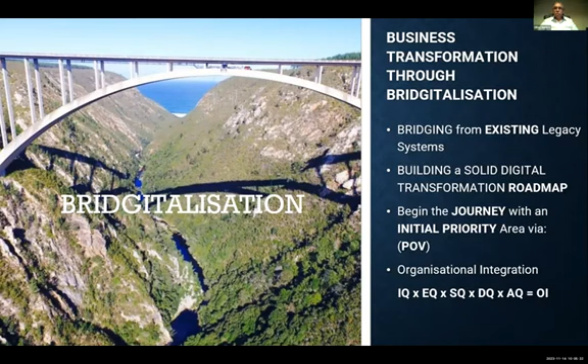So the first thing is a number of the mining sector companies are challenged, especially in South Africa. You've got challenges of load shedding, where it's impacting the business operations, and you're also investing in supplementary alternative energy sources. You're also challenged by Transnet with the transportation and logistics, both on the rail as well as the logistics side of things at the ports, and also some of the cycles in terms of lower pricing of the commodities at any given time.

So all these journeys that we're embarking on with digital has to support the business transformation. But we also have to have a product agnostic mindset. And what we've seen from our experience is that companies would buy brands and products as opposed to understanding what the business challenge is at that particular time while you look at the appropriate technology that you embark on.

We also know that there's been divisions between IT and operational technology. We need to align IT with operational technology as well as engineering technology and build an architecture that supports the overall business strategy. This is how we move beyond pit to actual profit, becoming visible across the entire value chain, including planning, scheduling, and optimization.

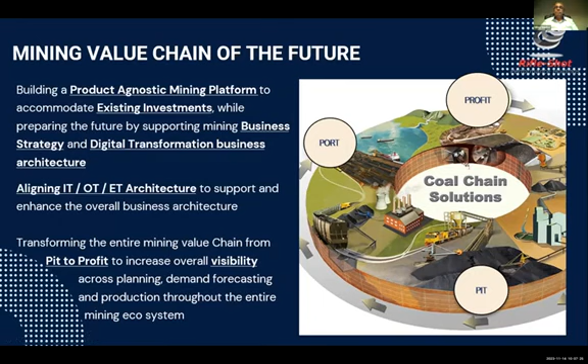I wanted to touch briefly on what used to be called supply chain, which we've coined value chain optimization and visualization. You're familiar with this, where you go through exploration, extraction, production, processing, inventory management, and logistics on the rail and port side, and then ultimately shipping to the end client.

Peter, who's speaking after me, will cover a lot on things like stockyard management, so I'll skip that. But I want to touch a little on the production side, where we've selected some of the best OEM offerings and made it very easy for you.

If we look at our partnership with AVEVA, we have offerings for production management, commonly known as AMPLA, and on unified planning and scheduling called Spiral. We've implemented this with mining companies.

A recent example from our previous webinar was how we automate and digitize downtime management. Although we were doing downtime management automation with AMPLA, which includes integration to backend systems like SCADAs, PLCs, etc., we actually built a digital transformation journey, moving beyond automation of downtime management to materials movement management, inventory management, and so on.

We also have an offering from ION, both on the WAM side, which is for demand planning and forecasting, as well as QMaster, which has been used in South Africa and globally by large mining companies, including on the coal side. So that's the whole area of production, planning, scheduling, and optimization.

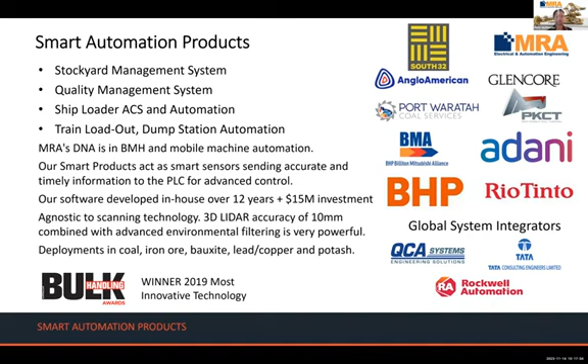So a little bit about the maturity of our smart stockyard management system: 65% of Australia's exports utilise MRA's smart stockyard management systems. That's over 250 million tonnes per annum utilising our system. This shows the maturity of our systems, first deployed in 2014, with advancements made year upon year throughout that journey as we've deployed more and more systems.

As we are the developer of these systems, not just a reseller, whenever a client comes to us with a problem, we can work through that and add differing modules to our solution. For that reason, our system is quite modular, which allows us to customize the solution for the client - it's not a one-size-fits-all approach. We can work with the client, build and detail the scope of the project, and then pick and choose the most appropriate modules for the solution.

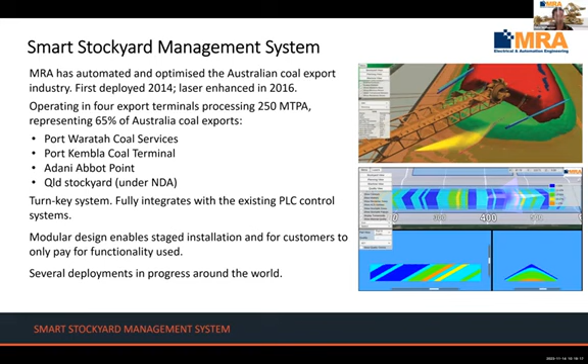So from a case study point of view, we have a couple of key deployments that we'll go into a bit of detail in today's presentation. First one is Abbot Point Coal Terminal, Adani's coal terminal in Australia. They export roughly 55 million tonnes per annum of a combination of metallurgical and thermal coal.

As you can see there, we've gone through a staged approach with them over the years, and that's something we can do with all of our clients. We can work with them and work with their budgets to go through that staged approach.

So we started off with automating their stockyard, just using PLC logic, so we're able to completely de-man their stockyard. Then we assisted them with the same process for their dump stations, de-manning their 2 unloading dump stations at this facility.

Then we introduced our SMART Stockyard Management System in 2017 when they wanted to get greater utilisation out of their stockyard and greater throughput. In doing so, we're able to increase the throughput of their facility by 12%, so an additional 5 million tonnes per annum. It was a very big result for that already automated facility.

And that project, we won the Innovative Technology Award at the Bulk Handling Awards in 2019.

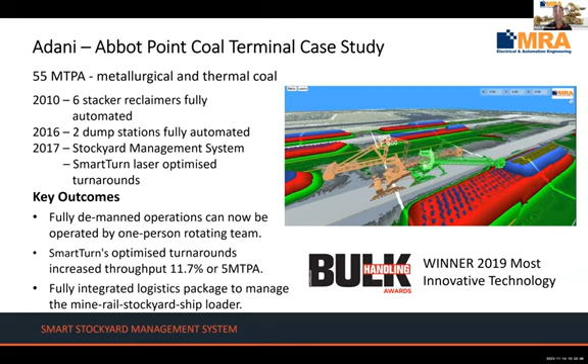Port Kembla Coal Terminal, this is the facility where we will do a live demonstration of our system in action. It's a coal export terminal in Wollongong, Australia, about an hour south of Sydney, which exports approximately 14 million tonnes per annum.

Once again, we worked with them through a number of stages over a number of years to get to their required goals, which was to regain control of their facility. While it was manually operated, they were having issues with not being in control of their full operations and the delays that were occurring because of that, and also wanted to be able to utilise the most of their small stockyard capacity.

So by adding in our 3D modelling and then automating their machines, and then in 2021 we added laser optimisation as well, we've been able to fully automate their facility and provide them with a gross loading rate improvement of approximately 35%. It was a very big gain for them, and we'll go a little bit more detail about that facility in the live demonstration coming up.

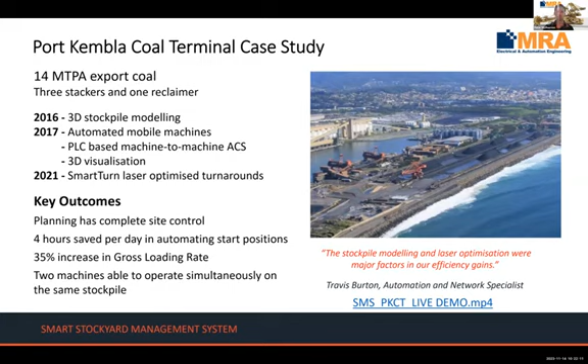A little bit about the staged approach that we recommend for our clients. It's something we can work hand in hand with the client and scope up appropriately throughout the project. So step one is being able to build a digital twin of the stockyard, and I'll speak more about each of these steps in the upcoming slides.

Then we can add in LiDAR scanning. This can be immediately or can be later down the path. For example, Port Kembla Coal Terminal added LiDAR scanning 3 years later. It is critical if you have dozers, front-end loaders or trucks operating in your stockyard - it's a requirement immediately. But if you are using just stackers and reclaimers, we can operate our system without scanning technology and still get a very accurate model and a very good output.

Next step on the roadmap is semi-automation, introducing some automation functions into the machines. That may be allowing automated bench reclaiming, where the operator sets up on the bench and then the machine can finish it. Typically you'd get a throughput gain of around 7.5% in efficiency with semi-automation.

Our smart turn is the next step, which, as I mentioned in the previous slide, we can identify where the edges of the stockpile are and get the machine to turn around still in the material, which allows for greater throughput but also less stress on the machine as well. Typically you'd achieve an additional 10% gain with smart turn.

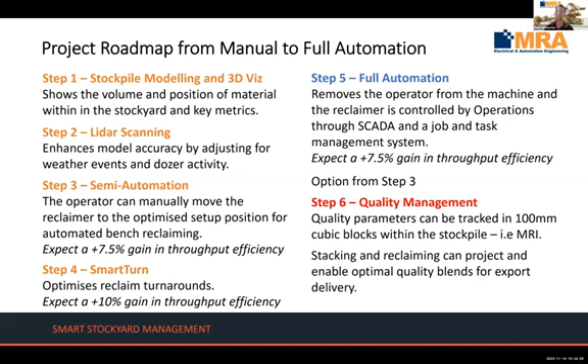I'll speak a little bit more about each of these steps, but the key part is if you are already semi-automated, we can start at that step and work our way through. Or if you are manually operated, we can start all the way back there. Or you may just be interested in modelling, for example, where you just want to know the quantity on the ground - we can just deploy that part of our system, or you might want to be interested just in the grade. So it's very modular, and we can work through that with the client.

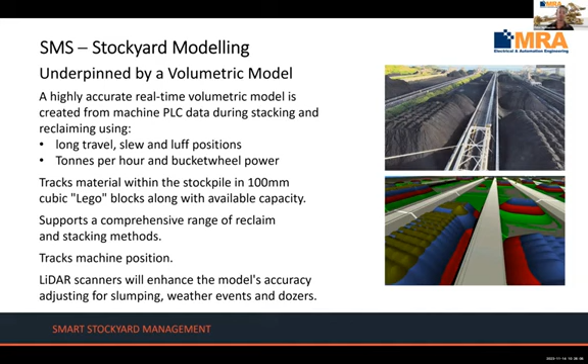3D visualization is a key part of the system. If you build a model, you want to be able to display that somewhere and give your operations personnel a tool where they can see exactly what is happening at any time in the stockyard. So it's a real-time visualization of exactly what's going on, where you can see the location of every machine and the state of every stockpile.

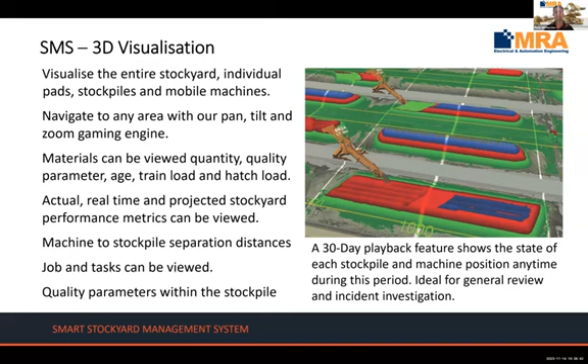And we can also play back for 30 days of operations as well. So we'll have a look at that, the real-time system at Port Kembla shortly.

Smart turn reclaim optimization: as mentioned previously, we introduced these blue bars on each end of the stockpile that show the current swing and the next swing where our system recommends the machine should turn around so it stays in the material and doesn't leave the material, causing flex of the boom, drop in production, and the like. Also a part of our reclaim optimization is being able to monitor the face of the stockpile to look for any slumping of material, so we can avoid that, or we can speed up if there's gaps in the material flow as well too. It's all about keeping that consistent loading on the bucket wheel.

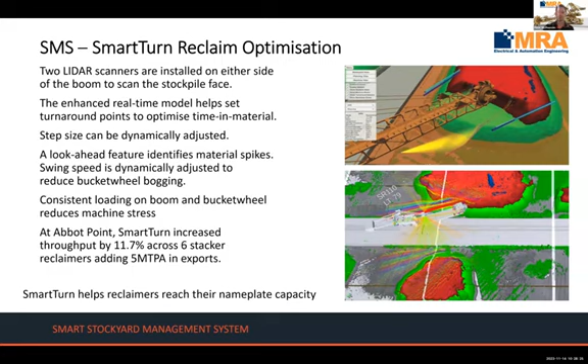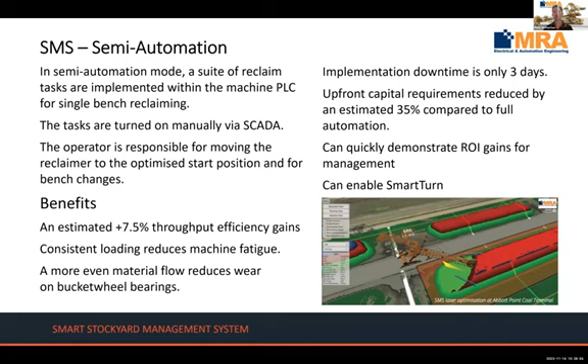Semi-automation, as I mentioned before, is allowing the operator to set the machine up at the beginning of a stockpile on the bench, and then allowing the machine to automatically reclaim the remainder of the bench. That starts to allow consistent reclaiming, which is less wear and tear on your machine, less fatigue on your boom, and keeping consistent throughput. Then once it finishes the bench, the operator is then able to relocate it to the next bench for reclaiming.

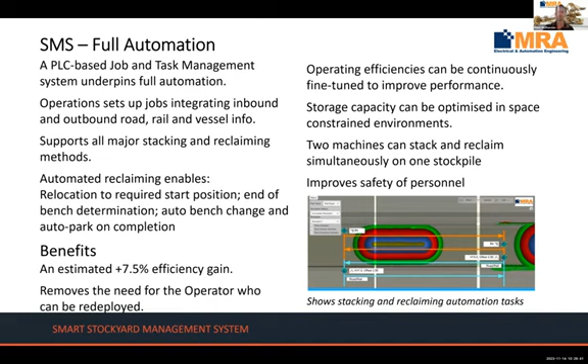Quality management is an additional module to our system, which is applicable for facilities that are interested in the grade. That may be because they're importing and want to confirm they are receiving the correct grade. It may be that they're exporting and want to confirm they are exporting the correct grade and not going well above their target—just meeting their target. Or maybe for a steel plant or a power plant that is trying to get the most consistent and appropriate blend of material into their facility.

So we can use online analyzers or laboratory sampling information and append that into our model. The way we go about that is we break our stockpile into 100mm cubic Lego bricks, and then we can append all of that data to each of those bricks, so it's not an average of a stockpile. It is down to each and every one of these little Lego blocks.

So when we do a reclaim task at one end, we'll get a different result to, say, reclaiming from another end or doing bench reclaiming. Our system allows you to then do what-if scenarios where you can see what grade you would achieve if I do, say, a 20,000 tonne pilgrim drop from the east end compared to if I did it from the west end, and you can confirm whether you would meet your target, fall below, or well above. Then you can adjust and try that what-if scenario again.

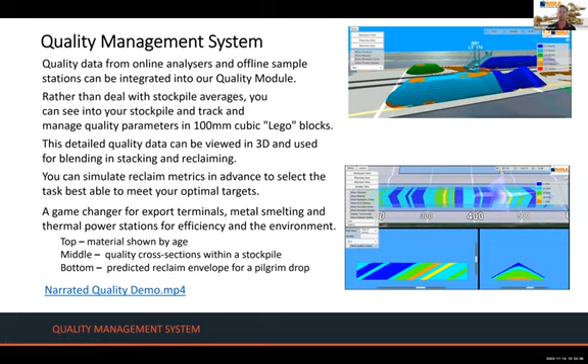So you can actually deselect these grades on the key here and only show, say, material that's over 12 weeks old. You can see exactly where that material is, in the same format as below, with all those little Lego bricks. So it's a very powerful tool, the quality management system, which also has some web reporting tools associated with it as well.

This was from an iron ore export facility in Australia where they wanted to track the grade of their material from the mine site, in every wagon into the stockyard at the port, and then into every hatch of the vessel. For import terminals, we can do the opposite, and it can also be for a mine going into a power plant - we can do a similar value chain. So we can look at the complete chain from pit to the end process and track that grade all the way through. Their key driver was they wanted to know what was in the vessel before it leaves port.

Previously, with their existing systems, they wouldn't get their results till 12 hours later. So they were just guessing what grade they were delivering. And 12 hours later, they'd work out whether they were under, over, or on target. This gave them a live, real-time value of whether they were on target - here they were looking at 6 different elements of iron ore.

So it all comes down to how much you get out of your sampling systems that we can utilise in our tools. And all this information is available via database API connections, so you can share all this information with your existing reporting tools as well.

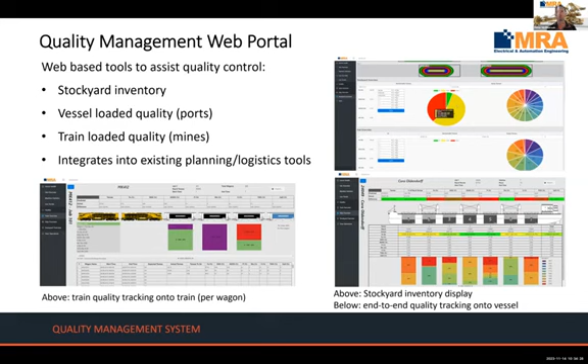So our last slide before we get into the live demonstration is just a bit of an idea of our core modules as well as our optional modules, which aligns with our staged rollout that we spoke to previously. So part of our core SMS, you get the volumetric modelling and the 3D visualisation, which we'll take a look at Port Kembla. Optimised start positions, so to ensure that you're starting at the most efficient location, you're not air swinging. Machine to stockpile separation distance, which we'll see in the live demonstration. Stockpile zone planning, performance tracking and reporting, so being able to share that information out into reporting tools such as Power BI or any other tools that you utilise. And 30-day playback, which we'll take a look at.

Third-party data integration allows us to bring in data from online analyzers, sample stations, planning, logistics systems, and any other tools in your suite. All these systems are applicable to different types of stockyards, including bucket wheel slew reclaimers like you've seen in these images and at Port Kembla, bridge bucket wheel reclaimers, A-frame scrapers, dozers and reclaim valves. It's applicable to any type of stockpile arrangement for bulk material.

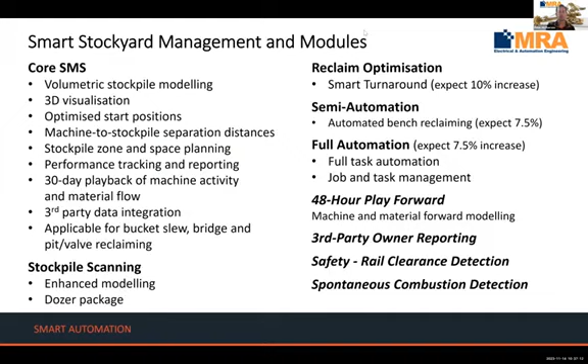So what I'll do now is stop sharing this screen and jump over to my live demonstration.

This is the Port Kembla coal terminal in Wollongong, Australia, an hour south of Sydney, exporting around 14 million tonnes per annum. This is their visualization environment used in the control room, displayed on a large format TV screen so they can see in real time a digital twin of their stockyard showing exactly what is happening. This has saved them a lot of time having to go out and visually inspect stockpiles before stacking or reclaiming, or after heavy weather events, reducing safety incidents for people visiting stockpiles, especially in inclement weather.

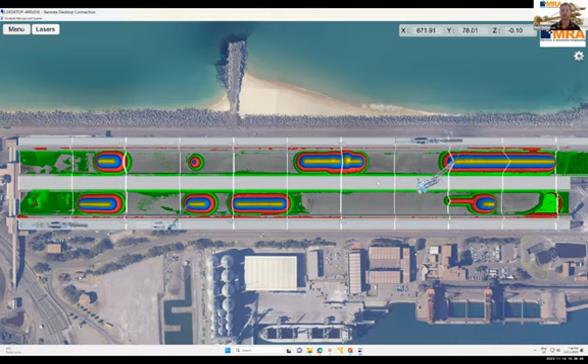This is a Windows-based application that can run on any PC on site, with multiple instances possible. Planning and logistics may want to use such a system, or engineering personnel to fault find stackers and reclaimers, or operations staff as well. It's a pan tilt zoom environment where you can zoom in, out and move around as required to see the stockpile from any angle.

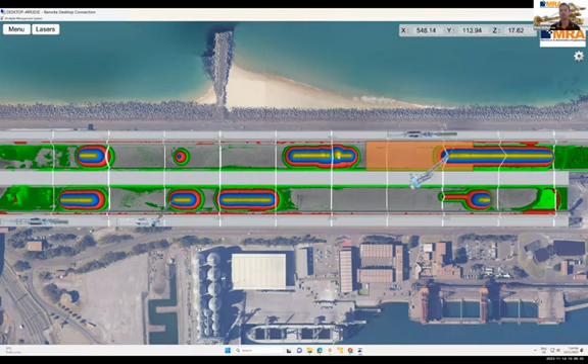We also have XYZ coordinates in the top right-hand corner, which show the position wherever you move your mouse. For example, the toe of this stockpile is at the 511 metre mark, the height is 17.6 metres, and the other toe is at the 650 metre mark. So it's a very powerful tool for all staff across the site to help with whatever problems they're currently working through.

As alluded to in the presentation, the colours represent the different reclaim benches: yellow being the top bench, blue and red the middle, and green the bottom reclaim benches. This allows you to see which stockpiles are fully built, such as this one, compared to something partially reclaimed, or if there's been some overstacking. The colours are very useful for getting a quick glance at what's going on.

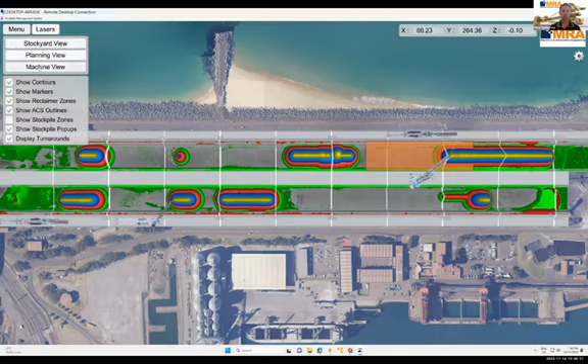This is real time, which is a key component, showing live operations. For example, we can look at machine views and see the machines in action at that time. This is Stacker 8, and we're looking at the machine front view. This view will follow Stacker 8 around wherever it moves, and we'll see it in operation.

It's currently set up, ready for stacking, and shows material coming off the end when stacking, though it's not doing so at the moment. This also shows the separation distance between the boom tip and the stockpile, which is passed into the control system to assist with stacking and anti-collision with stockpiles. The reclaimer also provides separation distance to the stockpile to avoid running into it during setup, which is very useful to avoid damaging the machine when setting up in a stockyard.

So with these machine views, we can change to any machine. So there's Reclaimer 3, machine front. I looked at their operations plan - they're planning to start loading in about an hour's time.

So they've already set up the reclaimer in preparation to reclaim this stockpile. You can also see the machine separation distance of 15 metres. Notice between those two stockpiles, this one looks like a true stockpile compared to Stacker 8 a moment ago, which was quite smooth. This has been built using our underlying volumetric model.

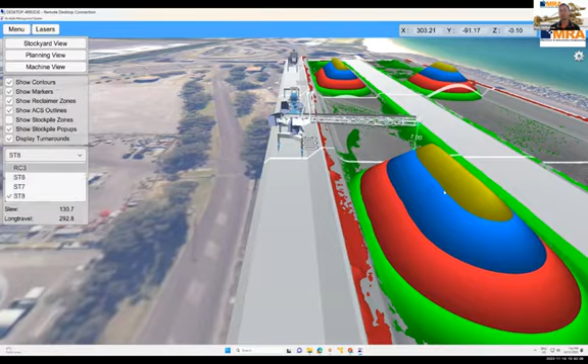This stockpile here has been updated via our scanning technology. So if we have a look at the top down view of the reclaimer.

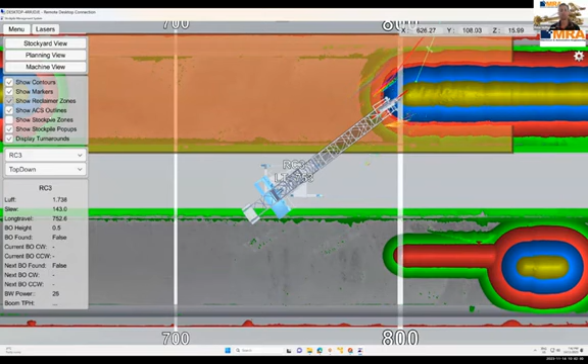If I turn on the lasers, we can see the laser scanners shining. They're mounted on each side of the boom - it's a 3D LiDAR scanner, and you can see each of the coloured dots shining on the surface of the stockpile. So that is updating the surface of that stockpile, taking it from smooth, like we saw with the stacked stockpile, to a realistic stockpile.

And they'll be scanning the face as you're reclaiming side to side as well, picking up any falling material and being able to then allow the machine to speed up, slow down, step back as required through that operation.

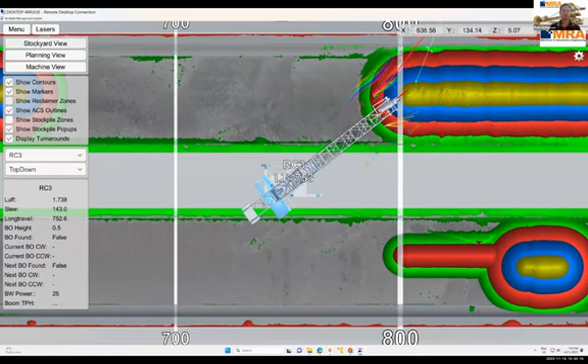We can also, if we go back to our stockpile view, show which stockpiles are planned for reclaiming at the moment. This orange box represents the reclaim task, so they must be planning to reclaim just this end of this stockpile - they'll be doing a pilgrim drop.

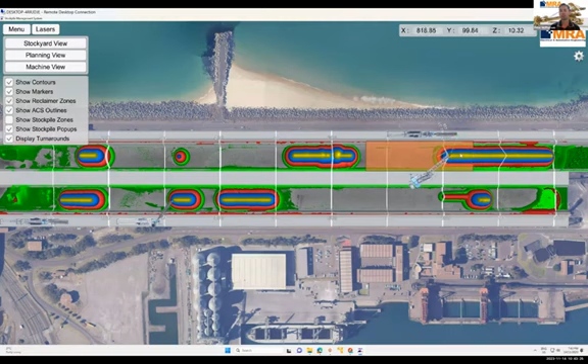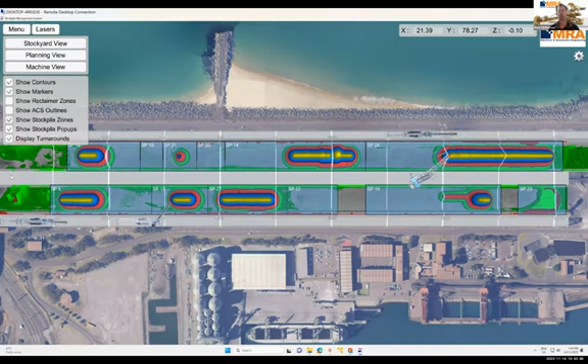Then we can also turn on our stockpile zones, which are customized zones throughout the stockyard. At any time, the client can adjust these zones - they can split them, make them bigger, make them smaller, as they work through their planning and logistics. You can hover over each of these stockpiles and get information about these zones.

So for example, this one is named Stockpile 14. It shows the minimum and maximum chainage marks of that stockpile, the calculated tonnes on the ground inside that zone - so 44,000 tonnes - and the free capacity, how much more could you stack in that zone. So 40,000 tonnes. How much free capacity is there if they do overstacking?

This facility, when there's forecast of dry weather, they can overstack - lift the stacker up slightly higher and throw material over the back of the stockpile to get some additional space. If they go into that mode, they'd achieve an additional 18,000 tonnes, and the density of that stockpile has been calculated as 0.874.

So you can see as you move from stockpile to stockpile, you get information just about each of those stockpiles. We can also customize these pop-ups or the display in general. Some of our facilities put large text up the top showing how many tonnes is on the ground at any time across all of their stockpiles.

Which may be very useful for, say, a power plant to identify how many days of coal have they got left, are they running low, or for a steel plant, for example. This site, being an export terminal, they're more interested in each of these zones - how much material's in each of those. But we can add additional information.

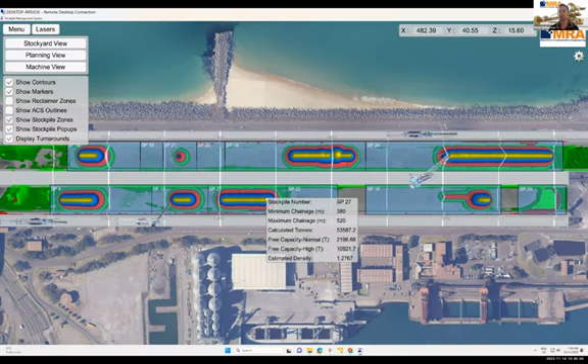Where if you go into your quality mode, you'll be able to see that down to the brick by brick level. But this view, we can just show some averages, which may be appropriate.

What we can also do, as mentioned in the slides, is look at a 30-day playback as well. So we can go from live operations to our playback.

So if we go to pick a day here on the 28th of October, you select and play. What you'll see now is all the machines have changed location and the stockpiles have changed shape. You can see this stockpile's extended, same as down here, and another one, a couple of ones up here, have been reclaimed since.

You can see a little bit of interesting behaviour going on here where they've partially reclaimed and then built a little cone on top of it.

So this is a very useful tool where you can go back up to 30 days, even longer, depending upon the size of databases for storage. With this site, 30 days was appropriate for them. And then we can replay the operations at differing speeds.

Down the bottom here, we can move the slider to any given time throughout the day. So now we're looking at 10 a.m. on the 28th of October in real time. We can also fast forward through, because the machine is quite big and quite slow, so sometimes it's great to move through at a faster speed. We can go all the way to 15 minutes per second.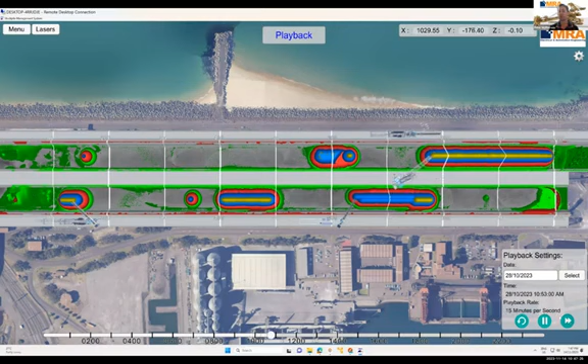You can see there where the stacker has packed up and now the reclaimer has started reclaiming. What I'll do here is pause it while it's on that middle bench and go to a closer view so we can see the reclaimer in action.

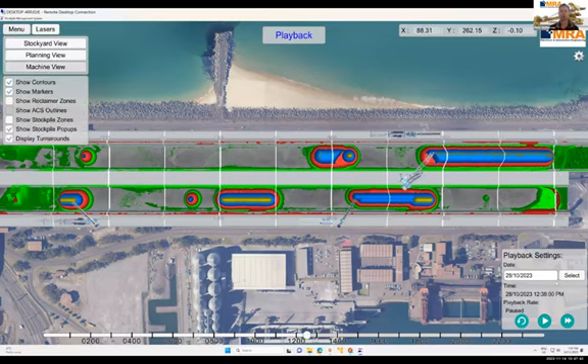So we're looking at Reclaimer 3 top-down view. On the left here is information about this smart sensor, about what information it's receiving from the PLC - luff, slew and long travel position, as well as down the bottom, tons per hour for when it's a stacker. In this case we're reclaiming, so that's not appropriate.

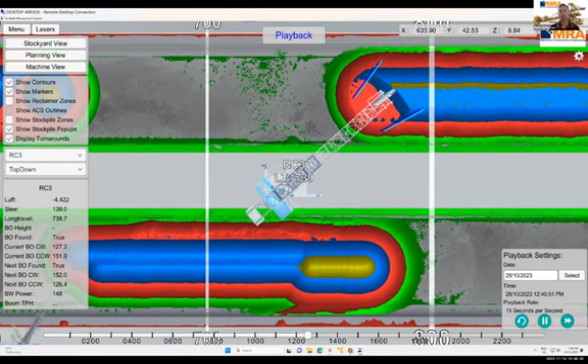And then we provide all of this information, plus more, to the PLC for use as part of its automation. The key part of that is where to start the stockpile, where to end the stockpile, depth of cut, and also the turnarounds. So what we're displaying here on this pop-up is the break outs, BO, in the clockwise direction - when I'm heading clockwise, at what angle will I leave the material?

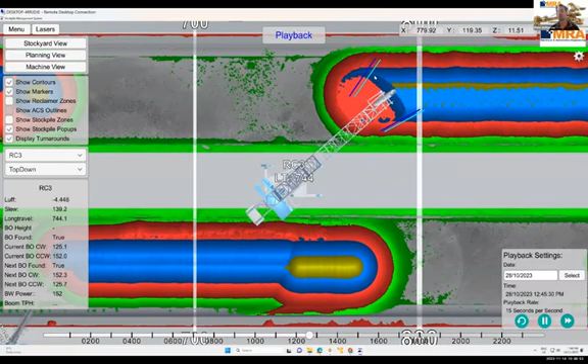That's represented by this dark blue bar. Same for counterclockwise - when will I leave the material heading in this direction? The PLC can then use that and turn the machine around prior to that angle, which leaves a tiny bit of blue material, meaning it's not leaving the pile, it's staying in the pile. That'll just collapse down to the next bench when we reclaim it. What it means is it's doing very optimal reclaiming.

And that is very hard to achieve without a smart system such as this. That's how we've been able to get those very large throughput gains with our systems.

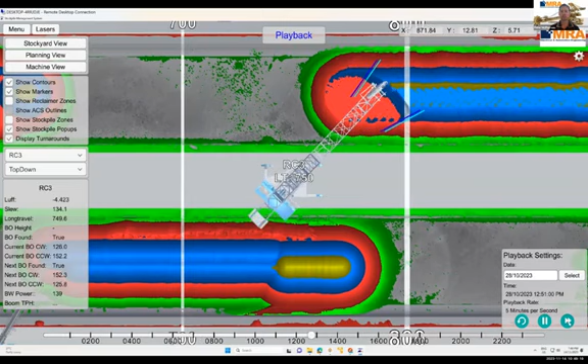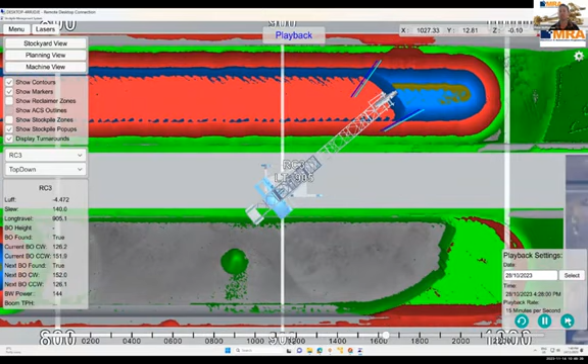So we can fast forward that a little bit more. We can see quick action, that stockpile being reclaimed. So on a Monday morning, for example, you can come in and watch your entire weekend replayed in, say, 10 minutes or so. It's very powerful, that 30-day playback, to understand if there was an issue - why does my stockpile look the way it does? Was there a clash with machines, for example? It gives you a lot more information than, say, looking at trends.

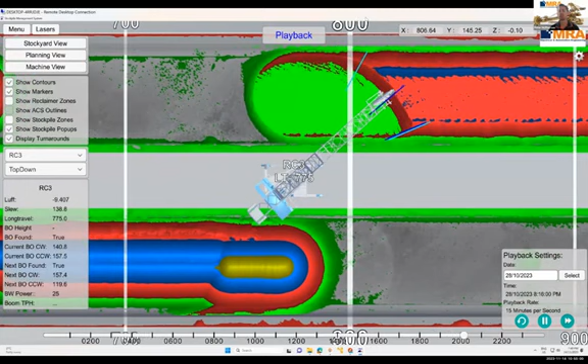So that's all I had for today as part of our presentation. It was a very quick run through our Smart Stockyard Management System and a live demonstration of the real-time system at Port Kembla coal export terminal. So I'll hand it over to Martin now.

Thank you, Peter. That was really fascinating and insightful, and hugely useful.

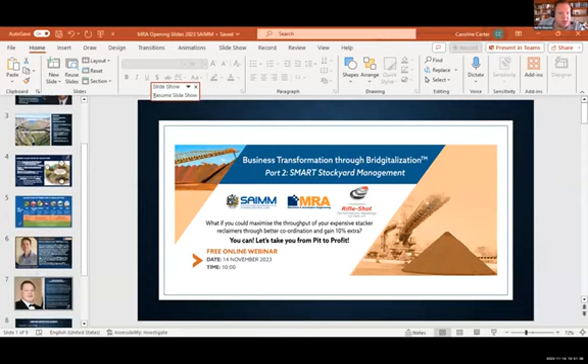Martin? Thanks, Caroline. I think you're sharing, but you're sharing the first slide. Maybe just go down to... Yeah. Thanks. There we go. 100%. Thank you.

And thanks to Peter. I can definitely say every time, obviously it's not the first time that I look at your presentation, but I'm impressed every time that I look at it. Just from my side, welcome to everybody as well, and thanks for joining us.

So in terms of the message we try to convey, obviously Dilly had a look at the overall view of embarking on a digitalization journey. And then Peter showed you one of our solutions that helps with bulk material handling and the automation of that. But that's all very nice, etc. We have to ask ourselves, how do we do that? How can we start on this, and how do we achieve those improvements that Peter spoke about? MRA and Rifle Shot is aligned on a lot of the ways on how we do business.

I'd like to take you through some of the key stuff that makes Rifle Shot who we are and how we do business with clients.

First of all is our innovation cube thinking. A lot of other guys selling software just sell the software and don't really look at the business itself. Whereas Rifle Shot is a bit different, where we actually look at your business and see what are the real needs. Even before proposing a solution, is that software really speaking to the key challenges you're experiencing, and is it going to add value to you? It doesn't help us doing a project selling software if that's not really the problem or opportunity in the business.